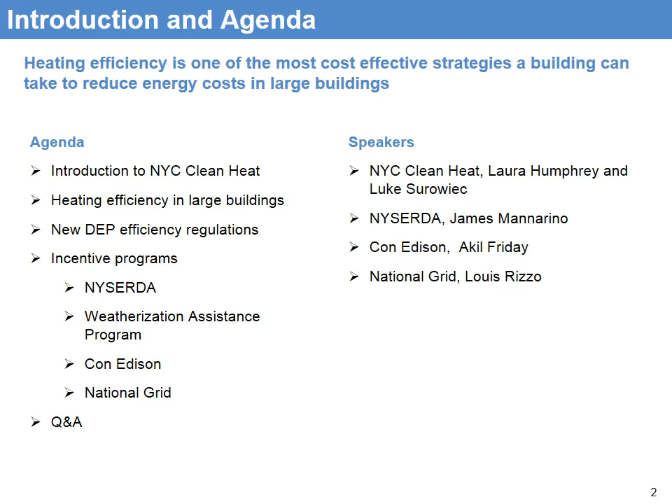So today we're going to be talking about heating efficiency and it being one of the most cost-effective strategies a building can take to reduce energy costs. Today we're specifically talking about large buildings, and really our focus will be on multifamily buildings. So we're going to do a brief introduction about clean heat, talk about major heating efficiency measures that buildings might want to consider. We'll also be discussing the new DEP efficiency regulations. After that, we're going to hand it over to some of our guest speakers here. We have James Mannarino from NYSERDA, Akil Friday from Con Edison, and Lou Rizzo from National Grid, who will be discussing the incentive programs that can help you pay for some of these measures we're going to be discussing. And then finally, we'll have a Q&A.

So for those of you who don't know, Clean Heat is part of Plan NYC. Although it affects energy and climate change, this is really an air quality program. And this is because the Department of Health found that PM 2.5, or soot pollution that comes from buildings burning number 4 and 6 heating oil, has an extremely high impact on public health in New York City. We've already seen a lot of accomplishments from the program and a reduction in this type of harmful pollution since the program started. The 2013 results have shown that there's been close to 800 deaths prevented a year annually because people are switching off of heavy heating oils, and thousands of hospitalizations and emergency room visits. So this is a really impactful program.

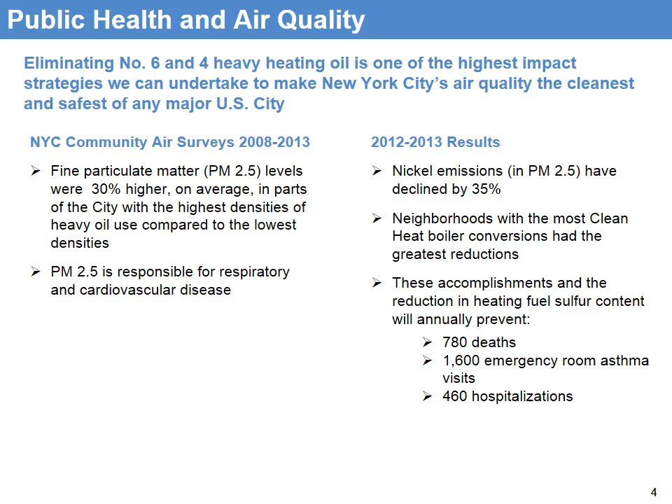It's really important if your building is burning heavy heating oil still, number 4, number 6, that you stop using it, not just for the operations of your own building, but also for the health of all New Yorkers.

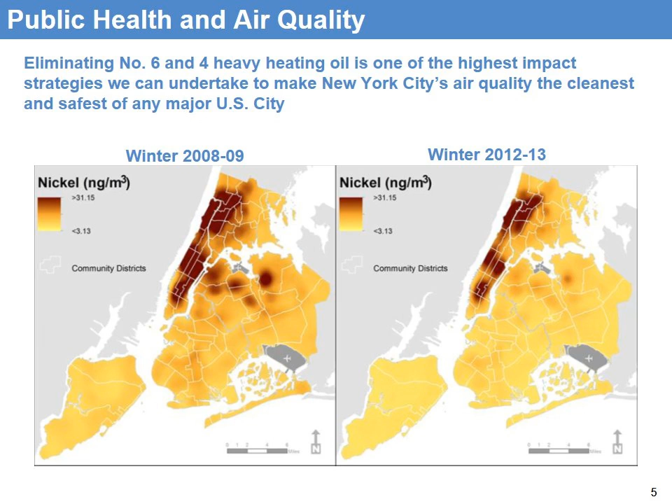This map shows you where the pollution was the densest when the survey was first done in 2008, and you can see on the right how much progress has been made, and this is from last winter's survey. But you can still see that there's areas of the city that still have a lot of this pollution, that still have a lot of buildings burning 4 and 6, and that's where we really need to focus.

So as a result of the health findings, the Department of Environmental Protection issued regulations to phase out heavy heating oil. So I'll just go over this briefly. The phase out is happening in 2 phases. The first addresses number 6, and we're actually coming to almost to the end of that. All number 6 in the city is going to be eliminated by 2015. And this is because permits for number 6 are not being renewed since 2012. And since these permits are renewed every 3 years, by 2015 there will be no more legal permits for number 6. The same exact thing is going to happen for number 4, except it's going to happen a little bit later. So the full phase out will be in 2030, meaning it will start in 2027.

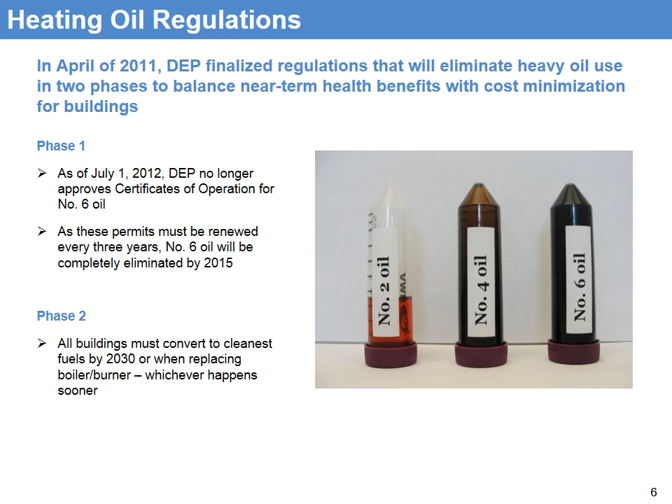But even though that seems like a really far time in the future, and you have plenty of time if your building is burning 4, it actually could come a lot sooner than that. Because if you have to replace your burner or boiler for any reason in this time, you're going to have to go to the cleanest fuel then. So people who are on 6 now, who are thinking that 4 is just the easy thing to do, think about it again, because you might have to do a conversion twice, which is just a waste of time and money for everybody, let alone to think about the health impacts that we talked about.

So with Clean Heat, we're completely fuel neutral. As long as you're moving off of 4 and 6, we'll help you assess any of the other options out there. Predominantly, we see a lot of ultra-low sulfur number 2 heating oil. We call it ULS2. That can be blended with biodiesel. We also see natural gas, steam, and other alternatives like cogeneration and geothermal.

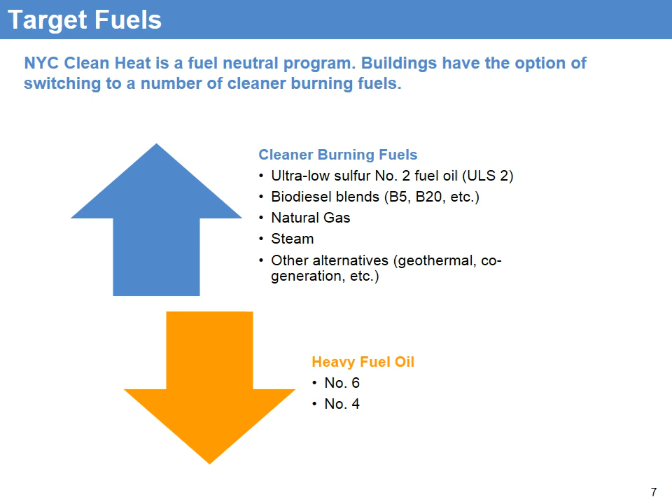So to help buildings who need to comply with the regulations get off of the heavy heating oil, Clean Heat was set up to provide technical assistance, financial assistance, and information to help these buildings make the switch. Again, you can reach us through our website, nyc.gov/cleanheat, through 311, through info@, and our team of account managers will work directly with your building to help you figure out the best solutions for you.

So now that we have a little background on Clean Heat, I'm going to hand it over to Luke Surowiec with Clean Heat, and one of our account managers, to talk to you about heating efficiency. Thanks, Laura. So just generally, heating efficiency, we talk about the most high-impact, low-cost strategies that will reduce your energy demand and of course increase the comfort of your building. Some of those include domestic hot water efficiency, steam system efficiency, since that's a lot of the buildings that we see here in New York City, heating control measures, weatherization, and boiler efficiency and maintenance.

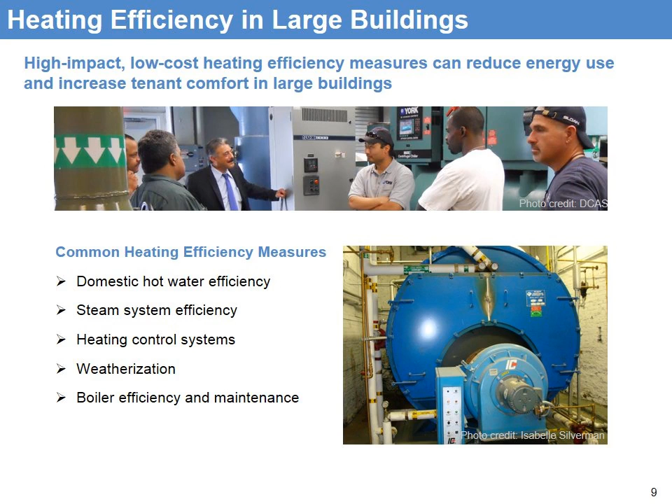In terms of domestic hot water efficiency, hot water can actually comprise a majority of the year-round heating load for a building. One of the best strategies for efficiency is to separate space heating from domestic hot water heating. By doing so, you can turn off your space heating for months at a time, and you won't have to run your large boiler anytime there's a demand for hot water.

In addition, your domestic hot water system can run on its own energy source or supply. Especially here at Clean Heat, we see many buildings that want to convert their main heating load to natural gas but might not have that option. If you have a separate system, you can run it on two separate fuels - for example, heating system on oil while domestic hot water runs on natural gas. You can also have other sources of energy, such as solar thermal, which is a great option to either supplement or replace the source.

Of course, there are other measures such as low flow fixtures and energy efficient appliances. One of the easiest measures is to just reduce the domestic hot water temperature setting at a building, just to reduce the heating load.

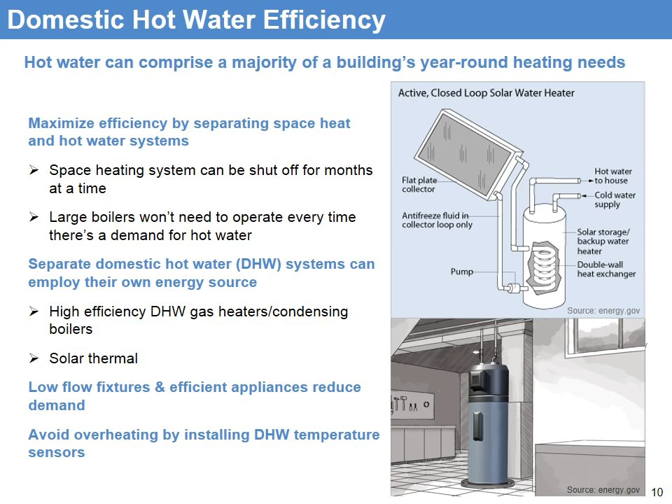In terms of steam system efficiency, because most of the systems we see are steam, there are a number of easy strategies a building can employ to have a more efficient system.

Maintaining and replacing steam traps and valves is a really easy and important measure. Some studies we've seen show that steam traps and air valves can reduce fuel use by up to 20%.

Balancing a system to prevent certain parts of the building from being cold and hot during the winter months is really important. Maintaining low boiler pressure, so you want that pressure as low as possible in order to distribute the heat throughout the building, and water conditioning, which helps prevent buildup in your system and improve the heat transfer in your boiler system.

Other low-cost measures like pipe and boiler insulation are really important. A lot of buildings in New York City still haven't taken advantage of putting in these measures. And of course, putting in radiator valves or shutoff valves gives an option inside the unit to have some control over the system and heating - great efficiency measures.

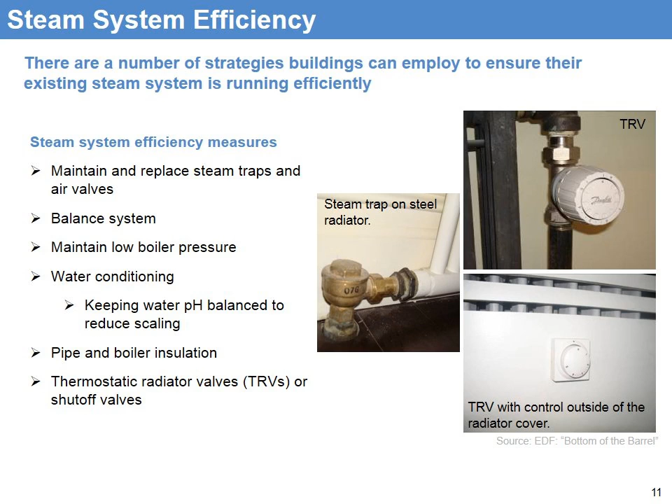Heating control systems are another really important factor, and these can run the gamut from really small systems to very large, robust management systems that monitor and help your system operate properly. These large systems can be computerized, and your maintenance team can keep tabs on everything going on in the building. Usually these involve installing interior temperature sensors and combustion efficiency sensors, which feed into a system to give data for the team.

Employing zoning systems is also important. Most buildings in New York have been built as just one zone, so separating the building into different zones allows you to only distribute heat to the parts where it's actually needed. And of course, radiator controls, which we talked about earlier with the thermostatic radiator valve.

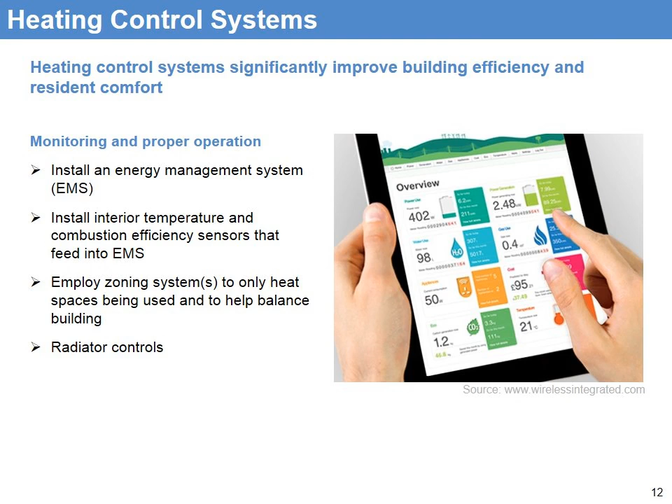Now in terms of weatherization, this is a really important measure. It's basically meant to improve the building envelope in a general sense, to help protect the building from outside elements. The Weatherization Assistance Program, which we'll talk about later, is a state program that has average annual savings of about 20% through some of the weatherization measures, and a lot of them are really low cost.

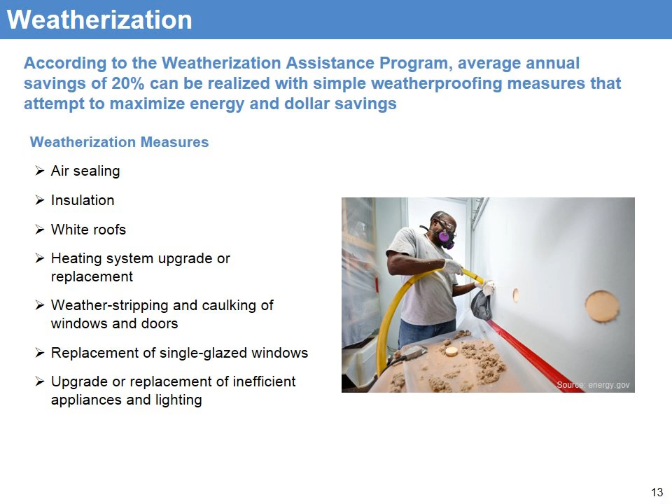Air sealing is a really important measure. Insulation, painting your roof white or installing a white coated roof is a great, easy option. Heating system upgrades are often part of weatherization measures too, along with installing weather stripping and caulking windows and doors to improve the building envelope. If necessary, replacement of single glazed windows can be a good option, but usually only if it's a really old single glazed window. Upgrading your appliances and lighting throughout the building is also on the list for weatherization programs.

And of course, here at Clean Heat, we talk a lot about boiler efficiency and maintenance. So this is one of our really important ones. The thing that we talk about at Clean Heat the most is fuel and the type of fuel that you're using. Using the cleanest fuels available is a great efficiency measure in itself.

When you're burning a heavier grade of fuel, which here at Clean Heat we want folks to get off as soon as possible, you end up not only polluting the air that we breathe, but also the inside of your system where the heat exchange happens, such as here with the tubes. So burning cleaner means less cleaning, more efficient system.

Monitoring the stack temperatures and makeup water are also great ways to see if your combustion efficiency is good or not. Also installing burner and draft controls, and employing an operation and maintenance plan for each building, specifically having your property manager, owner, or board monitor this is really important, and putting a plan in place where your maintenance staff is educated and has to abide by the laws and rules that you put into effect.

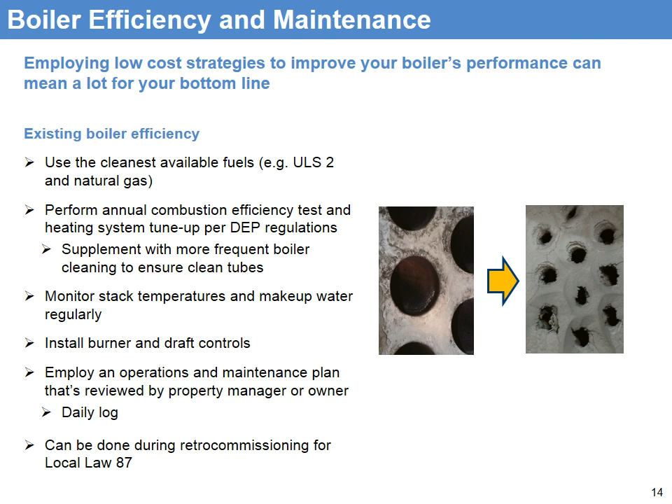Now I'm just going to talk a little bit about the new DEP heating efficiency regulations as of February 17th. The DEP now requires that the minimum combustion efficiency for natural gas-fired boilers has to be at least 80%, and for oil it has to be 83%.

Just to give you an idea, most of the major factors that contribute to this combustion efficiency are stack temperature and excess air level. So a 40-degree reduction in temperature at your stack can actually mean a 1% increase in efficiency, and 1% is a lot. So it's really important to monitor that, and now you have to comply with these regulations.

Through a study that the DEP conducted throughout New York City boilers, they found that 98% of all the boilers that run on natural gas were above 80%, meaning about 2% of the boilers will need to improve their efficiency in order to comply with these new regulations. In terms of oil, 10% of the buildings will need to adjust or improve their combustion efficiency in order to comply with these new regulations.

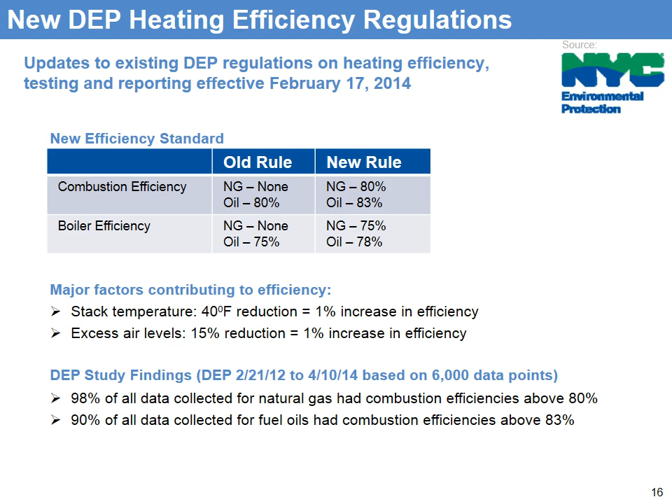Now, the way that DEP will be monitoring these new efficiency regulations is, first of all, you have to perform an annual tune-up and combustion efficiency testing and keep a record of that for 5 years. Then every time you renew your triennial permit for burning any of the fuels in New York City, you will have to submit the performance test to DEP, and that's how they will figure out whether or not you are in compliance with efficiency regulations.

So this is a really important thing DEP is doing. I think all boilers need to be a lot more efficient. Some of the ways to get there, you can see the guidelines: cleaning your tank, cleaning and inspecting your burner and boiler, inspecting the fire side and water side surfaces of the boiler, the breaching, chimney, figuring out the oxygen levels, maintaining the stack temperature - all of these things we talked about earlier in some of the efficiency measures throughout the building.

So there's a lot of money that can be achieved. Actually, in terms of an average size building in the NYC Clean Heat program, a 100,000 gallon building, or a building that burns 100,000 gallons per year, can actually achieve reductions of almost $10,000 to $20,000 with a 3% increase in efficiency. So you can see why those regulations were put into place. A 3% improvement in efficiency can be a lot of money and a lot for your bottom line.

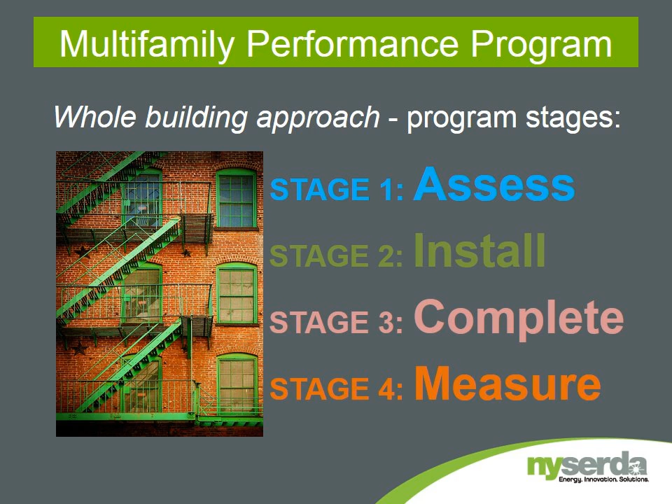So some points to consider relevant to clean heat. Buildings that come in as conversions are eligible for the firm gas level incentive. So if you're an oil building but you're converting to natural gas, and that conversion is part of the energy efficiency work, you'll be eligible for the firm gas level incentive.

We do require the 15% source energy reduction, but heating plant and distribution upgrades are always central to achieving that 15%. They usually make up at least 8% of the 15, 8 points of that 15. And if you have an oil building and you're not interested in converting or can't convert to natural gas, we do have a significant amount of funding available for oil buildings.

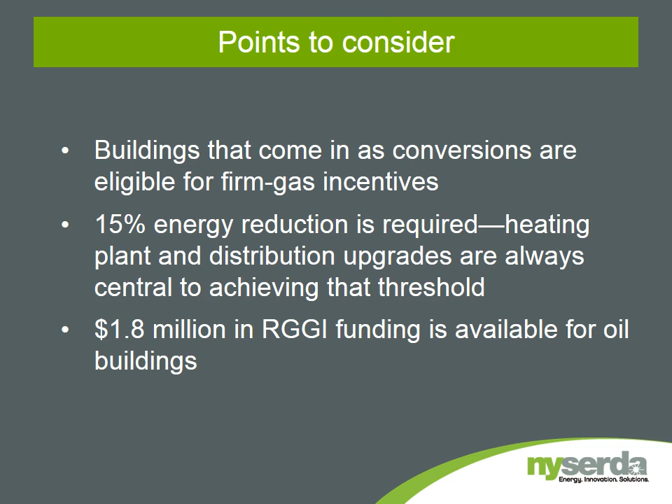So I'm going to go quickly through a case study of a building that went for the program before. This is available on our website. It's Phipps Garden Apartments in Queens.

They received $300,000 in cash grants from NYSERDA. They are saving about $180,000 a year in energy costs.

The main measures were to replace the boiler with a dual fuel heating system. They added insulation and air sealed the windows and doors, upgraded apartment and common area lighting, insulated the pipes, and added low flow fixtures. Again, this case study, along with several other case studies, are available on our website.

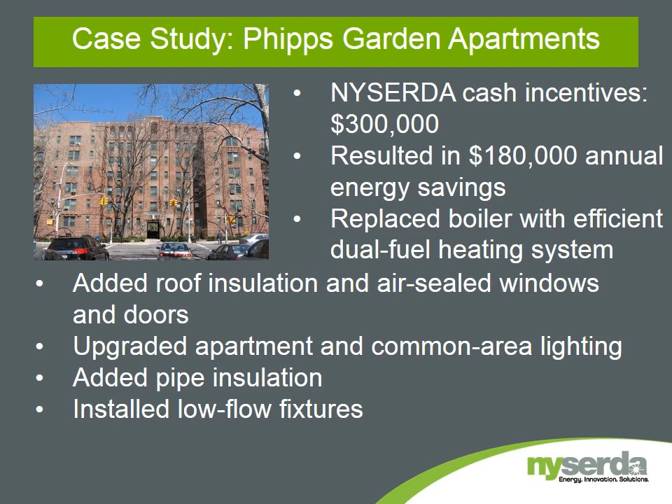So I guess I'll go quickly through the Weatherization Assistance Program. Generally, what makes this program different from NYSERDA's program is that while our cash incentives go to the owner, Weatherization program incentives are only for affordable rate buildings, and the incentives go to the contractors or service providers.

So to be eligible, the buildings have to have at least 50% of the tenants classified as low income. Providers are local nonprofits or public offices, and there's a list of providers on Weatherization's website.

But for multifamily projects, owners are required to invest some of their own funds for the retrofit project.

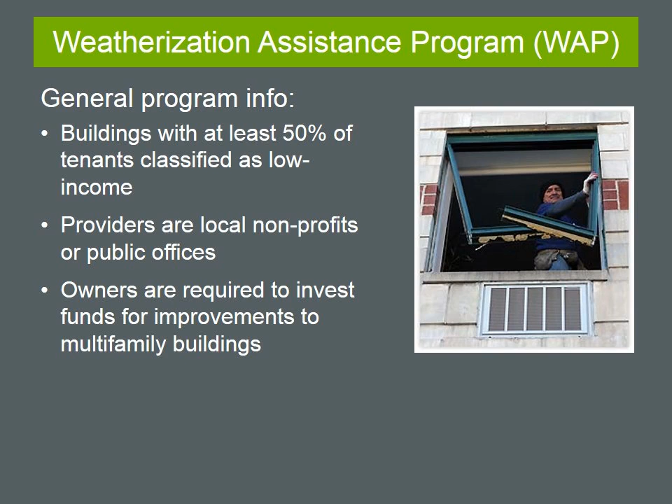So basic weatherization retrofits are a lot of air sealing, adding insulation, improving the heating system and distribution, window replacements, and mitigation of energy-related health and safety issues.

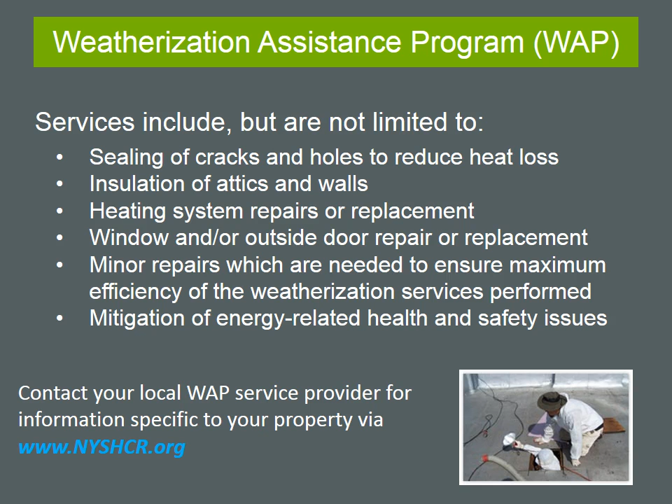And again, to find all of this information and local providers, go to NYSHCR.org. Great, thanks. I'm going to turn it over now to Akil from the Con Edison team to talk about

the Multifamily Energy Efficiency Program. Good, thank you, Laura. Good day, everyone. So pretty much Con Edison's Multifamily Energy Efficiency Program, as long as your building is between 5 and 75 units, you're eligible. We have electric and gas measures.

Customers must pay into the system benefit charge. So if you're looking at your Con Edison bill, you'll see a line item that says system benefit charge. That means you're eligible. We provide a free survey, and buildings must be in our service territory, which is pretty much all of New York City and Westchester County, Orange, and Rockland.

And AEA, Association for Energy Affordability, is our implementation contractor.

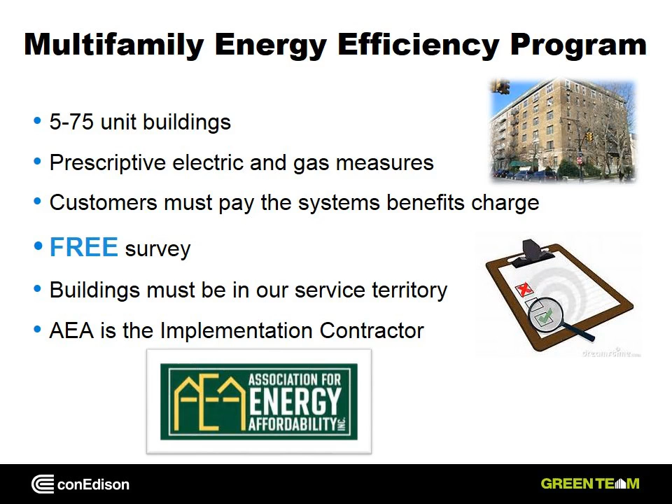Okay, the process, how you go about enrolling in our program: owner application, AEA completes the survey, owner reviews the survey and determines the scope of work. It's really simple - then owner signs the owner's agreement and contract. Pretty simple, it's a very simple process.

Contractor completes the work, AEA reviews the work for quality control, and owner receives the incentive check. So the checks are directly given to the owner. Very simple process. Actually, AEA, our vendor, really works - we have a lot of account managers at AEA who will walk you through the process. It's very simple for owners of buildings to participate in our program.

The benefits of our program include the free building survey, which will give you a good understanding of exactly what the cost benefit and payback analysis of this project will provide for you.

We also provide free in-unit installations. These include up to 6 CFLs installed in each apartment, up to 2 power smart strips, and low-flow devices such as low-flow shower heads and aerators, if your building is on a firm gas rate.

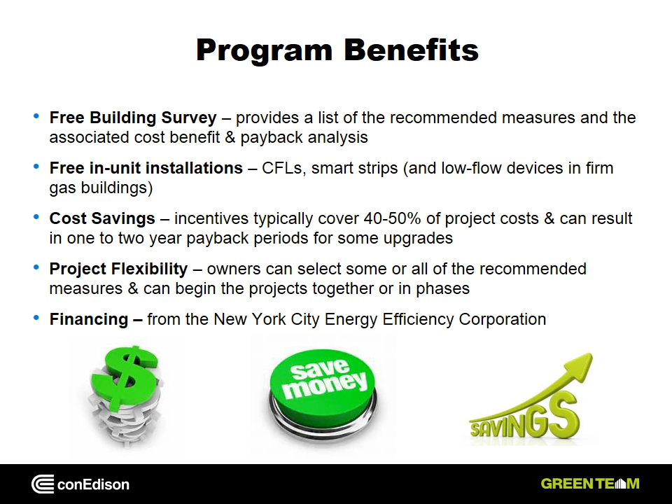The measures that are eligible: on our gas side, we have up to $15,000 on efficient boilers. Energy management systems, if you install them, we also incentivize starting at $3,500. Thermostatic radiator valves, better known as TRVs, we get $75 per valve. Pipe insulation up to $3 per linear foot. Roof and wall insulation up to 30 cents per square foot.

On the electric side, for the common area, approximately 40% of the cost we will incentivize. Sensors, $30; LED exit signs, $50; and new LEDs. And our free in-unit installations, as I mentioned before. So these are our eligible measures. Great, thanks so much.

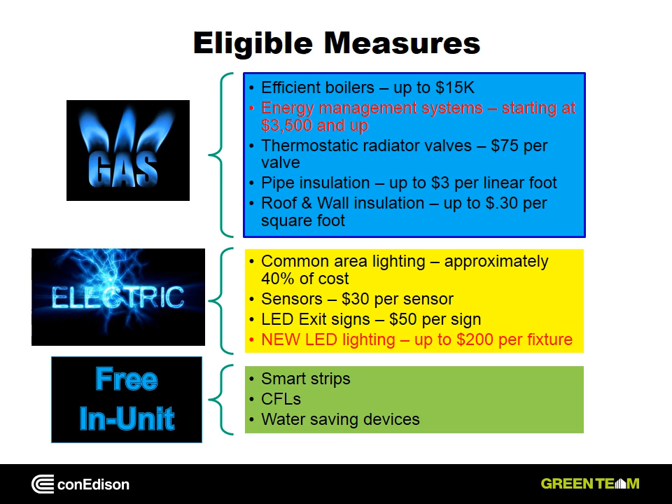Unfortunately, our representative from National Grid couldn't be here today, so Ken Camilleri, one of our grid account managers with Clean Heat, is just going to quickly review some of the incentives available through National Grid. This would be for gas customers in Brooklyn, parts of Queens, and Staten Island.

Thanks, Laura. Just a quick overview of the National Grid programs. They do have commercial, industrial, and multifamily programs, but we'll focus mostly on multifamily today. In order to obtain incentives through National Grid, very similar to the Con Ed programs, there are two ways: a prescriptive way and a custom way.

The prescriptive incentives are fixed incentives paid for installations of specific predetermined energy efficiency measures—furnaces, condensing unit heaters, steam boilers, hydronic boilers, pipe insulation, and controls. Those are the simple controls.

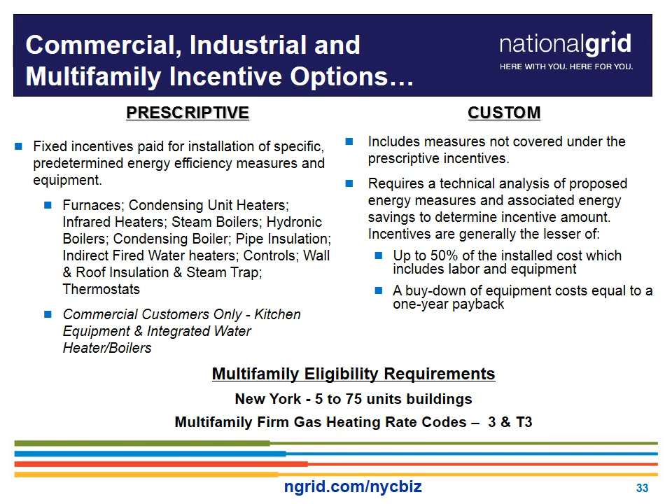The Multifamily Direct Install Program is a new program where participating customers are eligible to receive free installation of water conservation measures: kitchen faucet aerators, bathroom faucet aerators, and restricted flow shower heads. With restricted flow, you end up having to heat up less water, so this is where the energy savings come in.

Who's eligible? Buildings with 5 to 75 units in New York City, which for this particular National Grid program is Queens outside of what Con Edison covers, the northern section, Brooklyn, and Staten Island. And of course, on the Long Island side, it includes the Far Rockaway Peninsula.

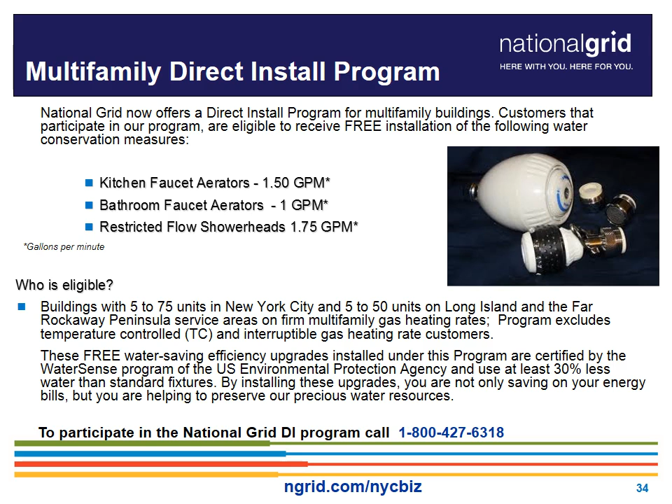These free water saving efficiency upgrades installed under this program are certified by the WaterSense program of the U.S. Environmental Protection Agency and use at least 30% less water than standard fixtures. This is where your savings will come in.

A simple timeline for how to obtain your incentives through the program—very important to follow these steps. Incentives are generally the lesser of up to 50% of installed costs, which includes equipment and labor, with buy down of equipment costs to equal around a 1 year payback. Incentive payments are up to $2.25 per therm, with a cap of $250,000.

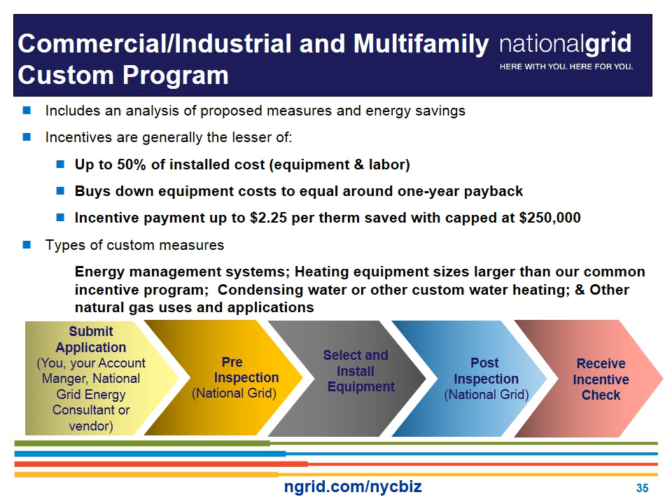Looking quickly at the timeline: pre-inspection is very important, because if you do the work and then apply without it, you most likely will not get the incentive. Post-inspection is also important. And then, as with Con Edison, the check is received by the customer.